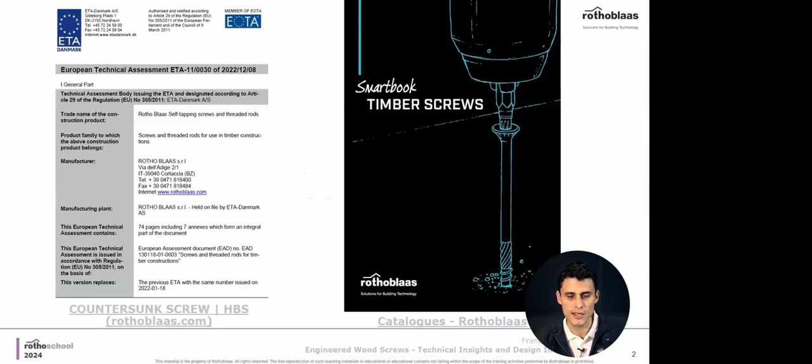So hope that after this presentation you can go and download these documents to study them and make a deeper impact on your projects.

Starting with the ETA, as I told you, it's the European Technical Assessment, basically the technical description of our screws. This document was developed to go further and give a better understanding and description of our screws, because most screws in the market are developed with another documentation called EN 14592, which is basically the most basic documentation for timber screws. So we went further and developed the ETA.

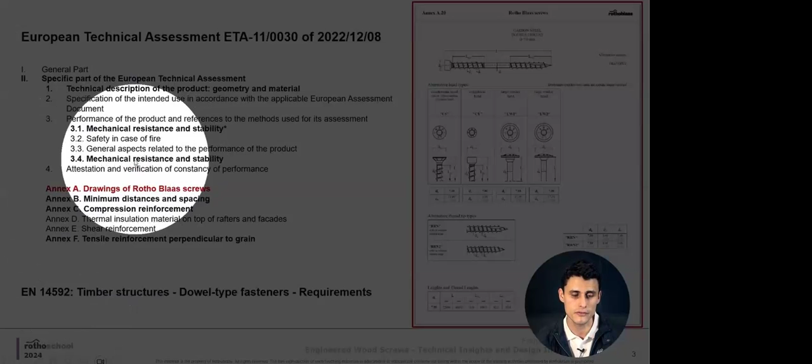In the ETA you can find these parts: a general part that's basically a description of the screws, and a specific part where we talk about specific issues. For example, we have a technical description of the products, like geometry and materials, a specification of intended use - it's important to say what these screws should be used for - and a description of the performance of the product, meaning mechanical resistance. We also talk about safety in case of fire, general aspects related to performance, and mechanical resistance and stability.

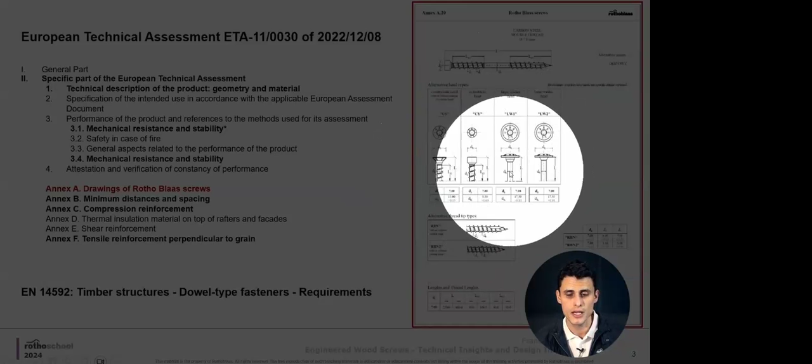Also, we have a lot of annexes that are really important. For example, Annex A shows basically the geometry of the screws. Here you find all the geometry aspects of the screws: the diameter of the head, the diameter of the body, the thread, etc. For every screw, you have one page with the full geometrical description, and there you can find this information, plus things like the minimum distances and compression reinforcement.

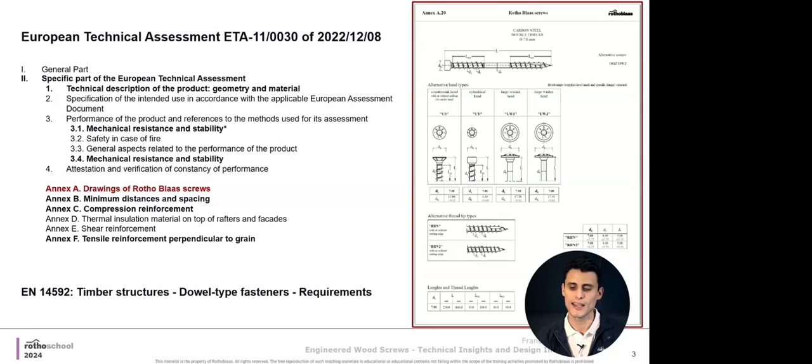It's important to note that in this presentation, I'm going to show you parts of the ETA. We are not going to read it all because, of course, it will be really tiring. The idea is that you have fun today and understand the document better, and later you can go read it by yourself.

The first part of the documentation is basically a description of the product, describing the geometry and material of the products. It's important to explain that wood screws are not just screws - they are different kinds of screws for different uses. In the description, we mention the 5 basic families that we have for our screws.

We have the screws I put in yellow, basically the HBS, the TBS, which are screws with partial thread. These are screws more used for carpentry connections. They have partial thread, so they can put the components together.

Then we also have the green screws in this case. These are structural, well, more suitable for structural connection screws. They are more rigid because they have a full thread. Also, they have different kinds of heads.

And then we have the DGZ, which is basically this purple screw. This screw is used to attach the insulation of facades in a structure.

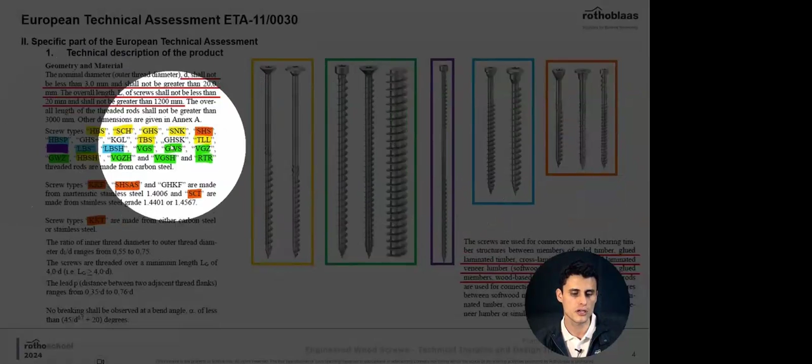In this case, as you can see, all these screws are described here with the codes that we have, which you can also find in our catalogs and on our website.

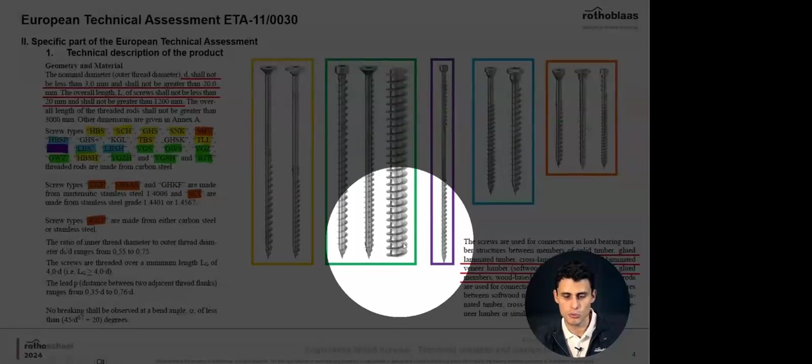This part also talks about the diameter these screws should have, that it should not be less than 3 millimeters and not greater than 20 millimeters. It also talks about the overall length, which shouldn't be less than 20 millimeters and more than 1,200 millimeters.

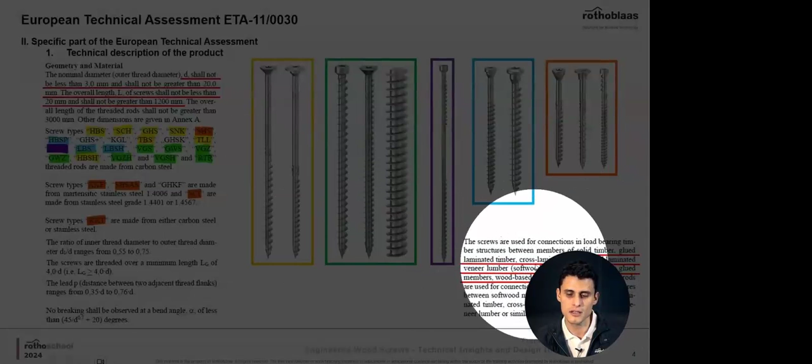In the bottom right corner, I highlight the main materials these screws are designed for: solid timber, glue laminated timber, cross laminated timber, LVL, and similar glued members. These screws are suitable for timber-based components or timber-based materials. This is a first description of the product, what it is suitable for, and what we are talking about in this document.

Afterwards, we start to talk about more specific issues of the screws that are really important to take into consideration for the design or also for the use of this kind of product.

In this case, for example, we talk about the insertion moment. You probably already know that if you put a screw inside the wood and use a really strong tool to install it, the screw can break. This always can happen because the metal, due to its properties, has a range where it can work.

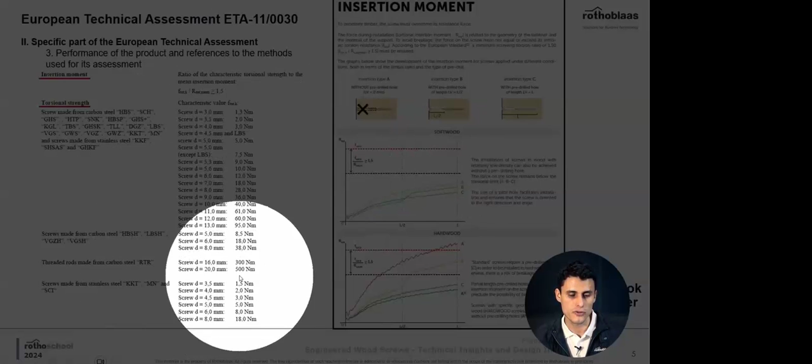In this ETA document, we mention this range where the metal our screws are made of can work. So we talk about the insertion moment, which is basically the moment you apply into the screw, and the torsional strength. The torsional strength depends on the material and the diameter. You can see a column with the diameters and a column with the torsional strength. If you put this number inside this formula, you find the insertion moment - the top insertion moment you should use, or less, so you don't break the screw. That's how you find it.

On the right of the screen, you can see something I took from the Smartbook for timber screws, because these two documents are interrelated, since we mention some issues from the ETA in the Smartbook and from the Smartbook in the ETA.

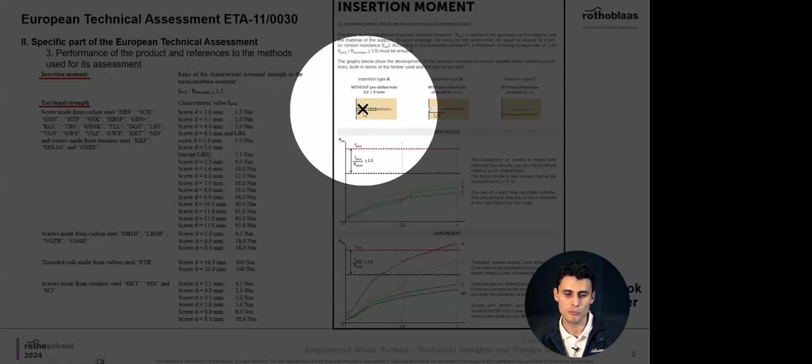In this case, for example, in the Smartbook, we talk about the insertion moment, that is basically this force that we apply to the screw. This force is also going to depend on the pre-drill that we do. For example, if we don't do pre-drill, if we do a pre-drill of just half of the screw, or if we do a pre-drill for the total length of the screw. In this case, you can see that, for example, when you have a pre-drill, the insertion moment is always lower than the extreme insertion moment that you should not achieve.

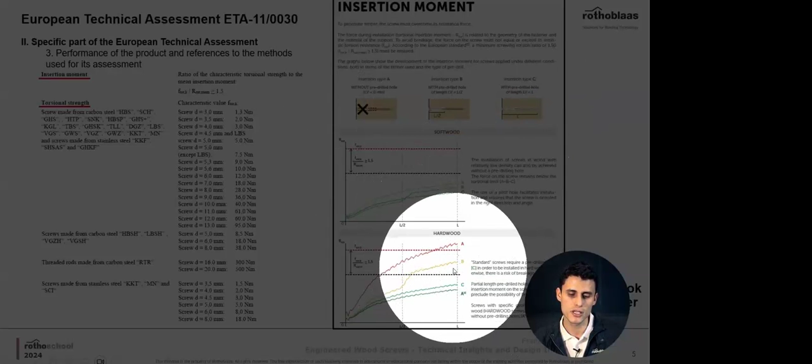This is for softwood, but when you have hardwood, and depending on the different conditions of the pre-drilling, you are going to have different situations of the torque applied to the screw. And therefore, for example, in case A, where you don't have any pre-drill, the screw is going to break. So this is really important to take into consideration, more as a practical advice that we give you, that you should not apply more than this torque to a screw so you don't break it.

Then we also talk a little bit more about this pre-drill. This is also from the Smartbook, on the right. We talk about the necessity of pre-drill when the density of the wood is higher than 550 kilograms per cubic meter. And here you can see a table that says what hole diameter you should use, depending on the outer thread diameter of the screw. This is really important. Our screws mostly work with the outside thread diameter. This is a big difference from other screws that are in the market.

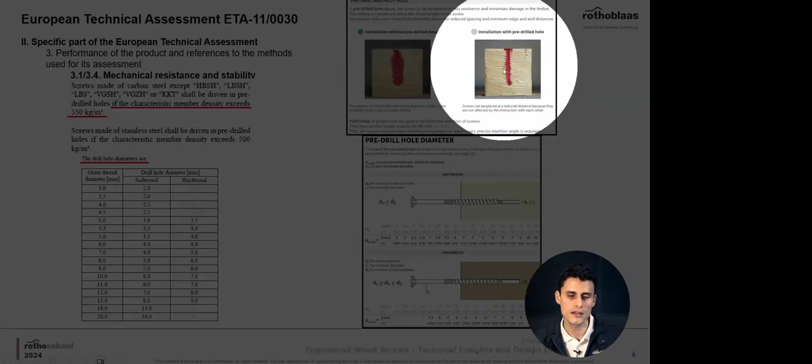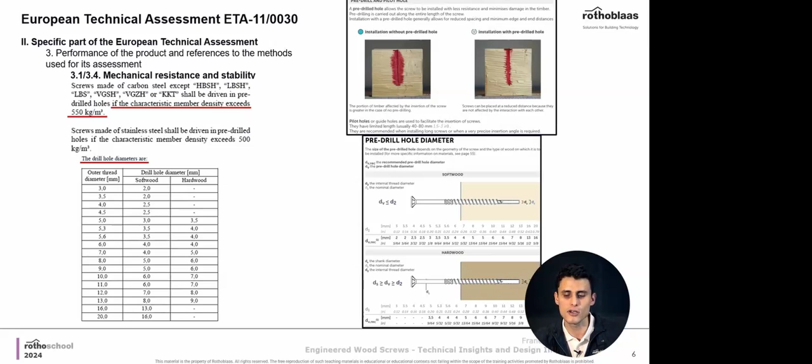And we also talk about the pre-drill hole diameter in the Smartbook, but this is something that you can take a look at. But this is a really, really important issue, especially with hardwoods, since I understand that in New Zealand and Australia you work a lot with hardwoods. Most of the time it's recommended to pre-drill hardwoods, even though we have some screws that are designed especially for hardwoods. It's better to always test and always make the calculations to define whether the pre-drill is necessary or not.

Okay, after these issues of use, installation, and so on, we started to talk about the mechanical resistance of the screws. How do we calculate how much load, for example shear load or axial load, a screw can take? Well, in the ETA document, we define the procedure to calculate these capacities. As I show you here, the ETA says that the calculation should be done based on Eurocode 5. Eurocode 5 is the code for designing timber structures in the European Union, and I show you here in the green box on the right the formulas that are included in the Eurocode. These formulas have been developed from the Johansen theory.

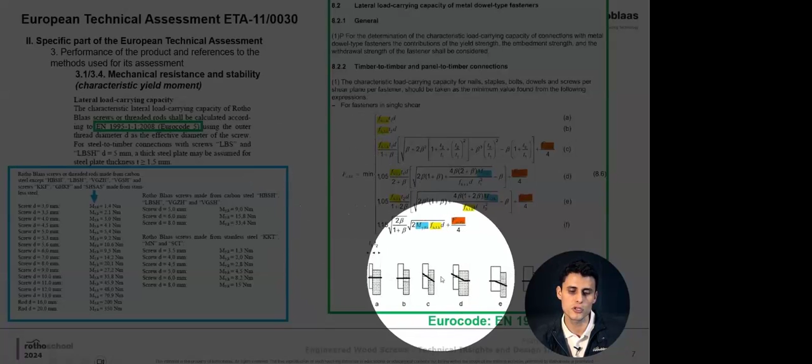Basically, Johansen developed these formulas for a shear failure of a connector, depending on whether the failure is going to happen through compression of the wood, through plasticity of the connector, or both. So you see here all these formulas that at the beginning can seem really complicated, but actually they are not that complicated. And why? Because I am going to show you where you can find all of the variables of these formulas.

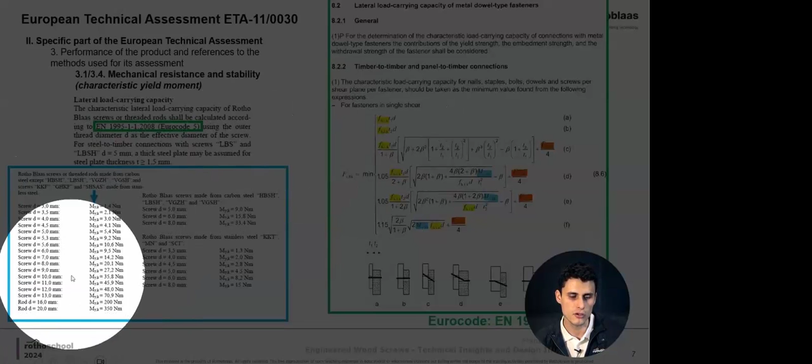To start with, in the ETA document, we talk about the characteristic yield moment. The characteristic yield moment is basically the moment where the material of the screw changes from the elastic side to the plastic side. When you apply this moment to the screw, it is going to pass to the plastic side. So in the ETA, we list the characteristic yield moments for every diameter of our screws. So as I show you here in a blue box, you can take this number from our ETA and include it here in the blue marks in the formulas.

To include the other aspects, we are going to have the embedding strength. The embedding strength is basically the capacity of the wood to be compressed. Of course, it is going to depend on the density of the wood that you are using.

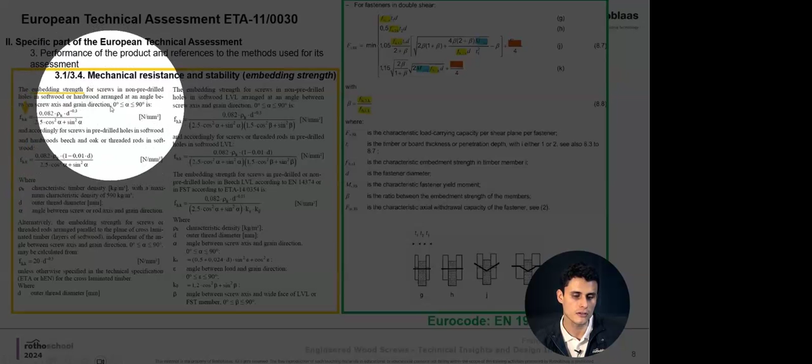So as you can see here, we are going to have in our ETA the formulas to calculate the embedding strength. It is going to be based on the characteristic density of the wood that you are using, the diameter of the connector, and the angle of the connector to the fibers of the wood. We have different formulas because, as you can read in the paragraph before, it depends on, for example, the angle to the grain, and whether or not you have pre-drilled holes.

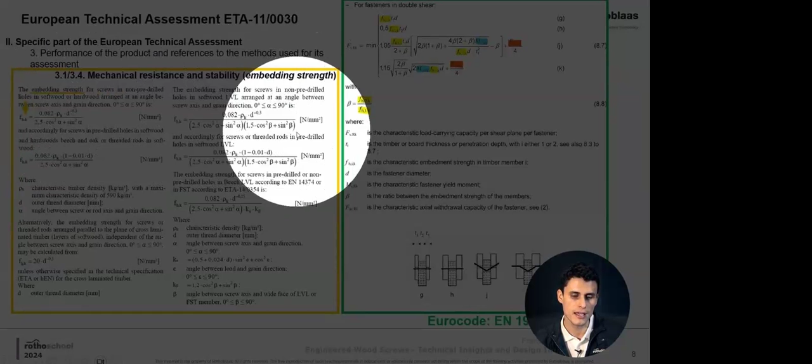On this other side, we have the formula for LVL, which I understand you use a lot in your country, in non-pre-drilled holes in LVL and in pre-drilled holes in LVL. Over here, we have, for example, the formula for the embedding strength in beech LVL, which is a really, really hard material.

So based on these formulas and on these variables, you can find your embedding strength, the fh,k, and put it in the Johansen formulas that are taken from the Eurocode. Johansen developed different formulas depending on whether there is just one shear plane or two shear planes, and also depending on whether all the components are wood or you have one component of wood and one component of steel, for example.

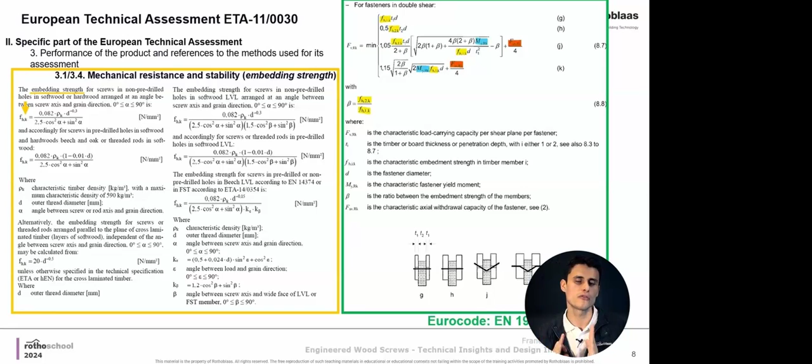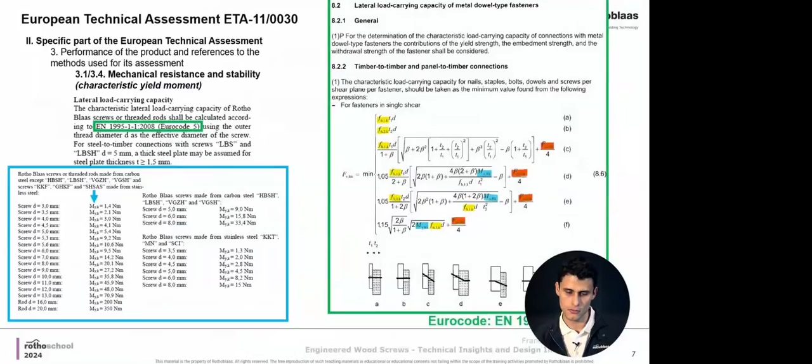In this case, before I presented to you the single shear plane, and here you can see the images, the graphic explanation of two shear planes for wood to wood connections.

The other aspect that we have in the Johansen formulas is the axial withdrawal capacity. This is also a really important aspect to define the capacity of the screw under tensile loads, right? When you have the screw and you try to take it out, this is the axial withdrawal capacity. Our ETA says how the axial withdrawal capacity should be calculated.

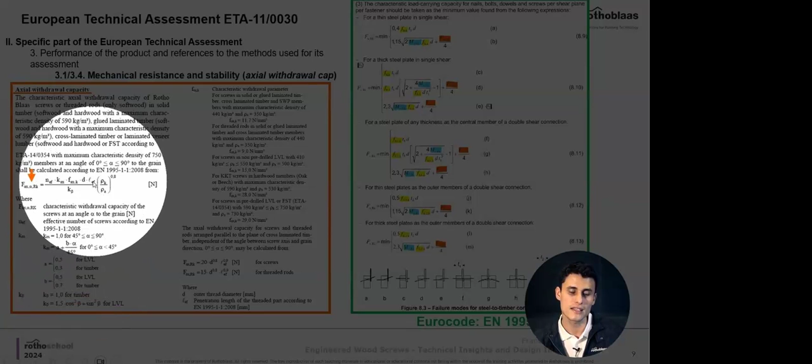It is based on the characteristic capacity of the material, the effective number of screws, meaning how many screws you have in that connection, and some other variables that you can find over here, including the effective length, which is basically how much of the screw is inserted inside the wood component.

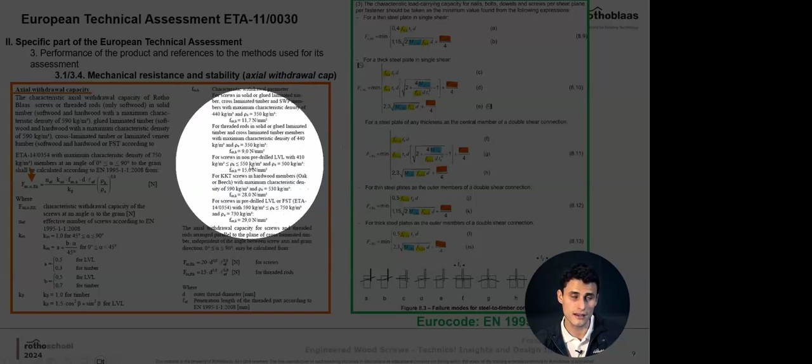For the characteristic withdrawal parameter of the material, here I put an example, but in the ETA you are going to find a lot of characteristic withdrawal parameters depending on the material and on the screw you are using. For example, here we have LVL with 410 kilograms per cubic meter, or other characteristic densities. You are going to find different parameters that you have to include in this formula, so you obtain the withdrawal capacity, and then you include it here.

This is really important because this part of the formula that says Fax divided by 4 is talking about the rope effect. Basically, the rope effect is, let's say, the way the axial capacity of the connector is going to help with the shear capacity, because when the connector starts to bend this way, the axial capacity starts to play a role. So this is important to include.

It is also important that the Eurocode establishes a limit on how much the axial capacity should be taken into account depending on the kind of connector that you have, whether it's a nail, a screw, a bolt, or anything. But yeah, it's important that you take this into account.

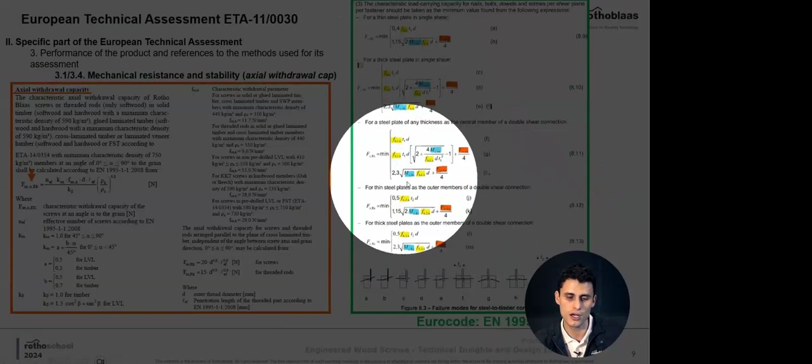And here at the bottom, you can see the graphic for these formulas, which are for the connection between a wood element and a steel plate element that varies in thickness. Depending on the thickness, you are going to have to use different formulas. All of this you can find in the Eurocode, and the information placed over here you can find in our ETA document.

Other important aspects present in the European Technical Assessment that we have for our screws are the mechanical resistance and stability related to the head pull-through capacity. Basically, this talks about the capacity when you pull the screw out by the head.

I mean, when you, for example, have a piece of wood, you have the screw inserted, and you have another piece of wood on the top of the screw, and you are pulling from that other piece of wood, not from the screw properly, the capacity depends on the head of the screw. This is really important because if you need a really high axial resistance, probably you will need to use a screw with a really thick head to have a better resistance.

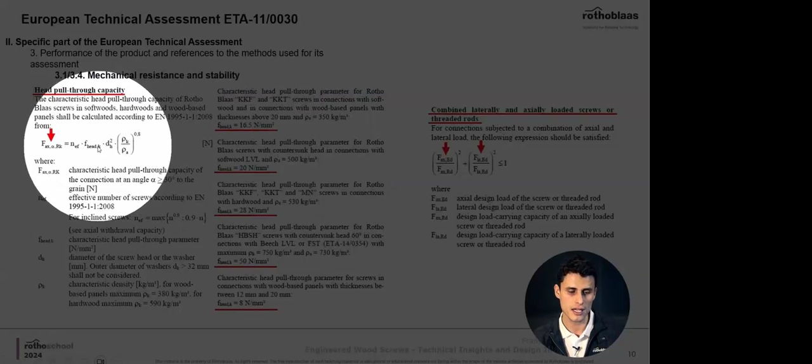In this case, we say that the axial head pull-through capacity can be calculated with this formula. It basically depends on the f head, the characteristic head pull-through parameter that we establish, and that you can find in the ETA document, depending on the material, depending on the particular screw that you are using, and you can find the number here, and then you take also the characteristic density and the base density for the calculation to apply the formula. Okay.

In this case, it is really important that when you do this calculation, you also take into account that the diameter of the screw is really, really important, same as the other formulas.

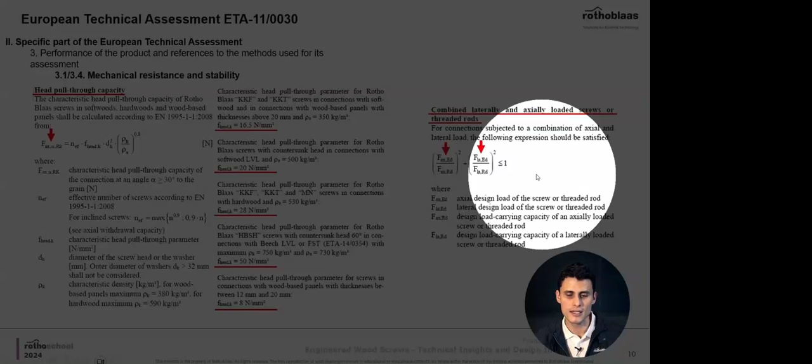And to finish with the mechanical resistance and stability, it's really important to make the calculation for the combined loads. This means when you have a screw loaded in both shear and axial, you should make the verification that this formula, which is basically the demanding load divided by the capacity of the screw in axial, plus the same but in shear, is going to be less than 1.

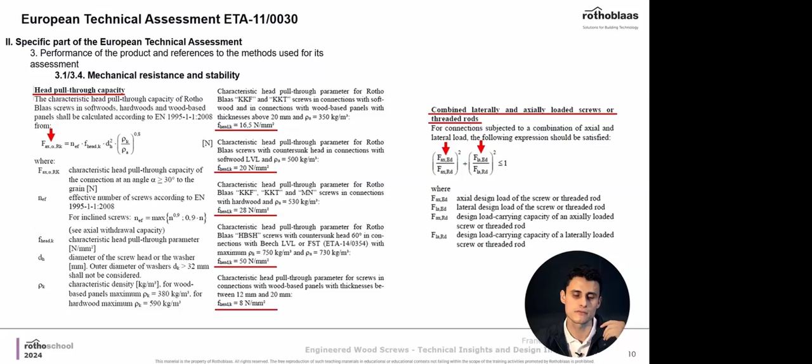So you are sure that if at some point the screw is submitted to both loads at the same time, it can take it. Because it can happen that the screw is good enough for axial, is good enough for shear, but when you combine them, the screw may fail. So that's what we are avoiding with this calculation. All of this, as I said, is described in the ETA document, and it is important that you consider all of this.

Talking about minimum distances. The ETA also talks about minimum distances. It is important that you understand this concept. We talk also in the Eurocode about minimum distances because if you put a screw really close to the border, really close to the side, the wood may fail. Therefore, if the wood fails, there is not going to be capacity. Even though the screw is really, really strong, there is no wood, so the connection will fail.

So we have to use the minimum distances to be sure that we have enough wood, enough material on all the sides of the screw to take the loads. Okay. So in the Eurocode you can find some minimum distances, but in the ETA we include them too, because the minimum distances from the ETA most of the time are lower than the ones established in the Eurocode. So we are improving the capacity and we are improving the technical details for our screws.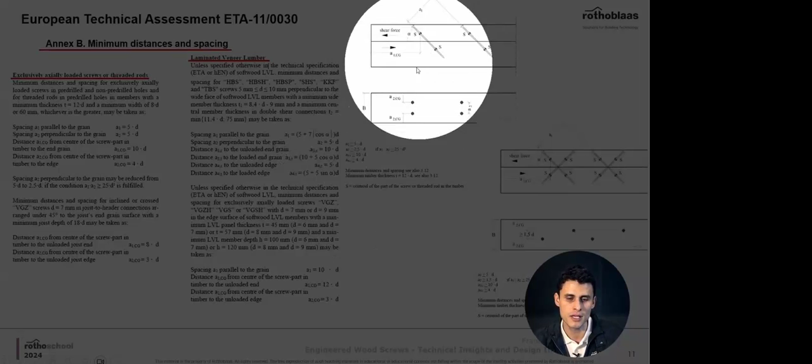Here you can see when you place screws at 45 degrees, you have the a1, that is basically the distance between them. We also have the a2,CG, that is the distance to the side border. And we also have the distance between them and the distance when you have cross screws. I put this here just to show you an example of the minimum distances we are talking about. In the document you can find all the details, but it's really important that the minimum distances are always described in terms of the diameter. That means that depending on the diameter of your screw, that's the distance that you should have.

Why? Because of course it's not the same having a screw of 5 millimeters with X distance to the border as having a screw of 12 millimeters, for example, with the same distance to the border. The screw with 12 millimeters is going to press the wood more, is going to affect the wood more, and therefore the wood is more likely to break or fail. And therefore we need more wood, so the minimum distance is increased.

Something really, really important about this issue too is that when you make the pre-drill, the minimum distances decrease. Why? Because as I showed you before, when you make the pre-drill, the breaking and damage of the wood is less, and you're going to have a better result for the connection.

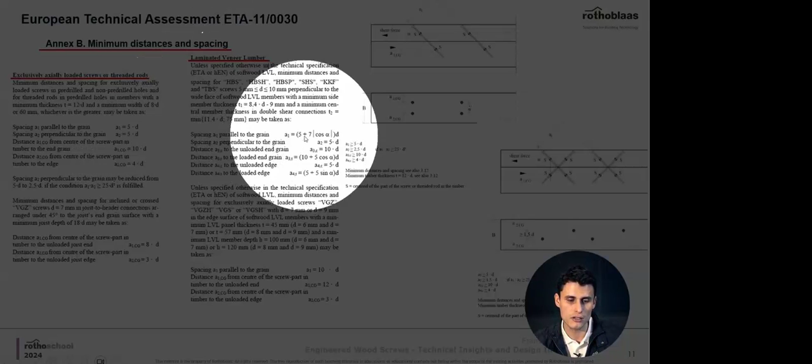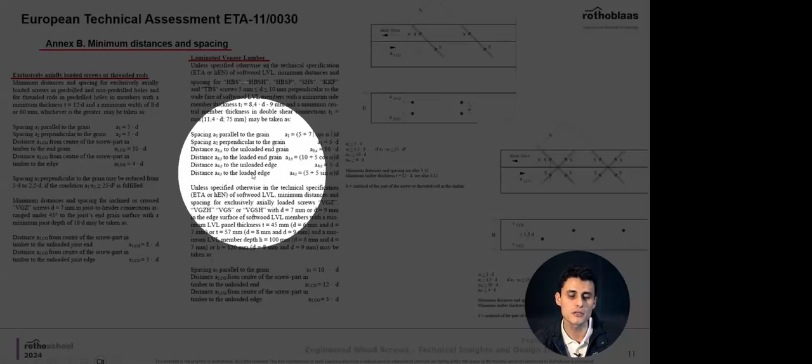I include here also the specification for the LVL, which I understand you use a lot in your market. We have specified clearly the procedure to calculate the minimum distances for the LVL. We have the spacing parallel to the grain, perpendicular to the grain, unloaded end grain, loaded end grain, and unloaded edge and loaded edge. The loaded and unloaded depends on where the load is coming from, and whether the edge or the end grain is or is not loaded.

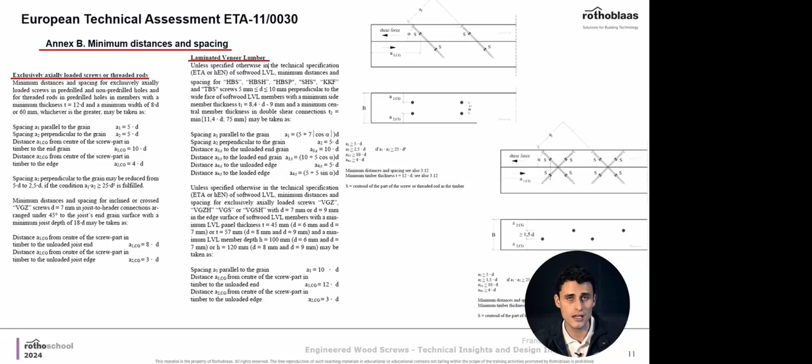If you need to get deeper into this, we are here to help, and you can contact our team in New Zealand so you have a better explanation. But it's really clear in our ETA and also in our technical data sheets that you can find online.

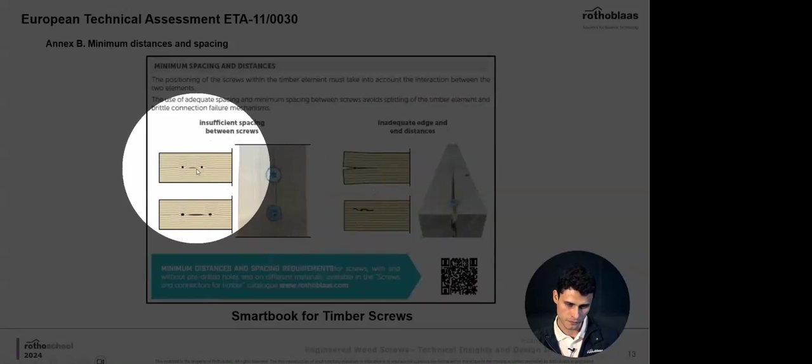This was what I was talking about the minimum distances, the importance of leaving enough distance between the screws. For example, in this case, we have the screws really close to each other, so the wood can open and is not going to work in the middle of the screws, and also to the border.

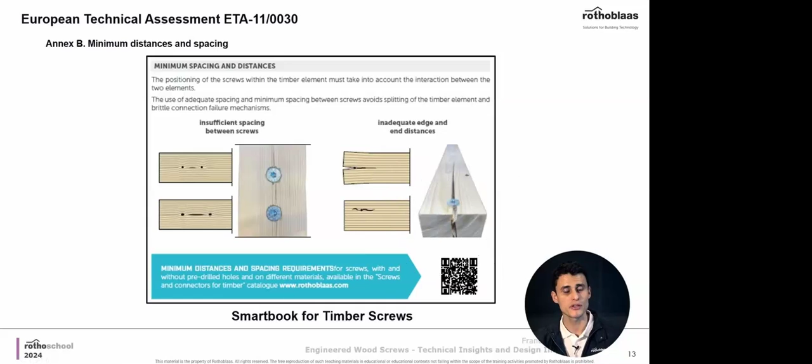This kind of failure is really common in wood construction because mostly the people that don't know about this put the nails or the screw really in the border of the piece, and if it doesn't break at the moment, it probably is going to break afterwards when the load is applied. So we have to be really careful with this.

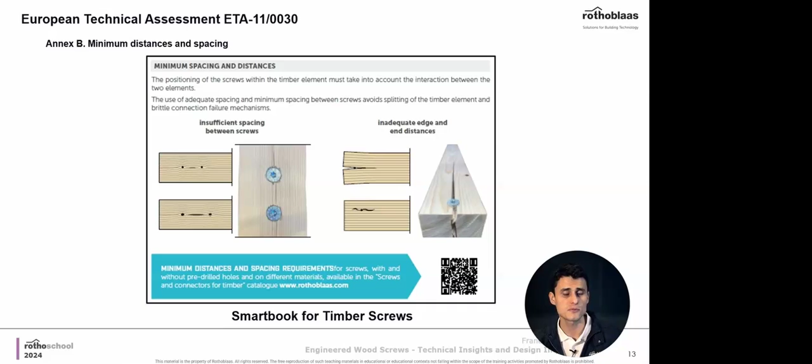As I told you, I'm not going screw by screw or product by product because it would take forever, but these are numbers that are really clearly specified in our technical documentation.

Another important issue included in the ETA, to close about this document, is that we specify the procedure to calculate the compression reinforcement. This is basically a reinforcement we do to the wood to improve its capacity of compression perpendicular to the grain. Depending on the species and type of wood, it has a limited capacity of compression perpendicular to the grain.

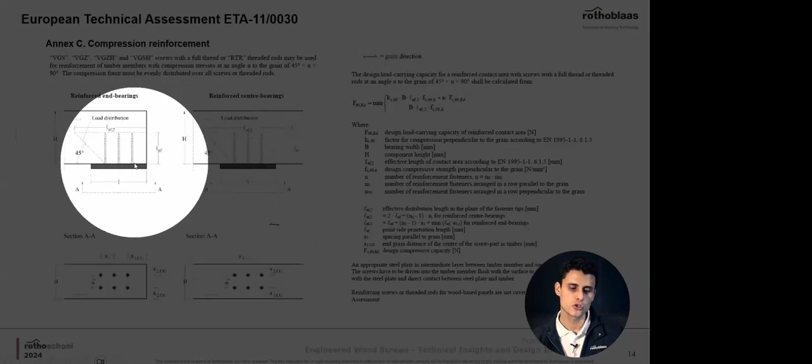For example, in this case, if you apply this compression here and the beam is by himself, probably it's going to fail sooner or later. So we put these full thread screws perpendicular to the grain to help take this compression and avoid the failure. This procedure is clearly specified in our ETA in Annex C.

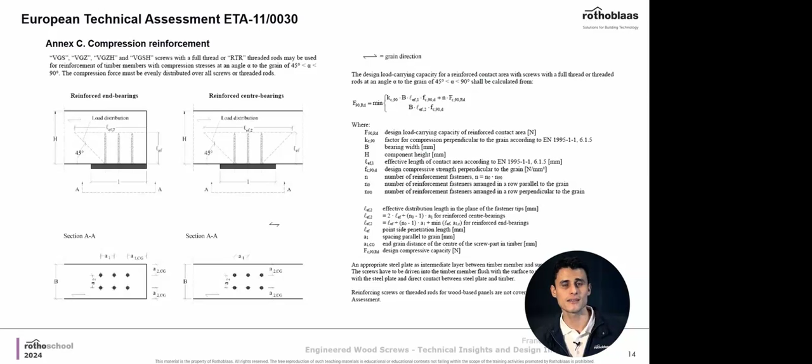So you can take a look at it in case you need it. It's really important that, as our screws are designed for this kind of use, we also specify it in the technical documentation. Same for the tensile reinforcement perpendicular to the grain.

You probably know that when you have this kind of cut in the beam, or when you have a connection that doesn't include the whole height of the beam, there is a chance that when you apply the load at the top of the beam, there can be a failure parallel to the grain. The wood is like little straws, one on top of each other, and when you apply a load, this kind of failure can happen.

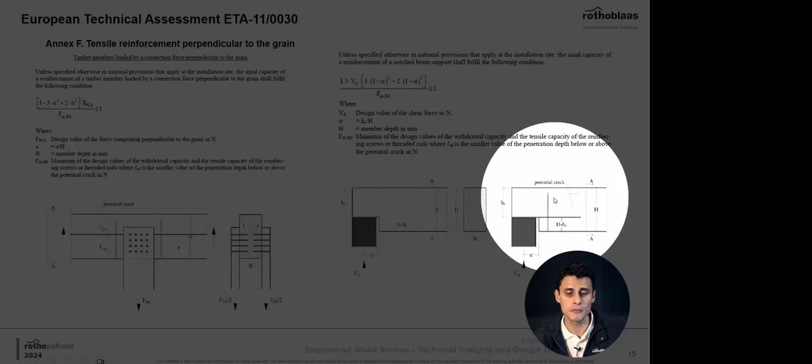That's why we have specified our full thread screws to make a reinforcement perpendicular to the grain that crosses from one side to the other of the beam and attaches all of these layers so they are not going to open after they are loaded. This is also clearly specified in the ETA, the formulas and everything to calculate this kind of use.

Okay, so that's all for the ETA. As I told you, I don't want to go really deep into the numbers and product by product because it would take forever, but it was basically a description, and the document is really clear. You can download it, take a look at it, study it, and in case you need more information, you can write to me or to my colleagues over there, and we will be happy to answer your questions.

About the Smartbook, this is a document that we developed some years ago trying to explain several issues related to our connectors. Not just about the connector itself, but mostly about what is outside the connector that affects it, because even though our products are really good, they can be installed in an infinite variety of environments, issues, or wood species. So it was really important for us that everyone in the market can understand these aspects that are related to the behavior of the connector but are not part of the connector.

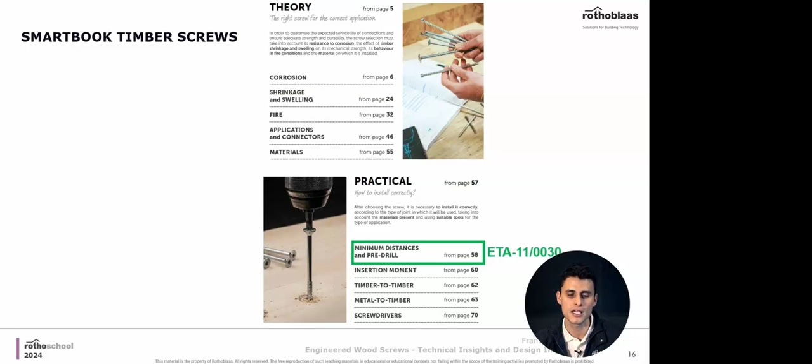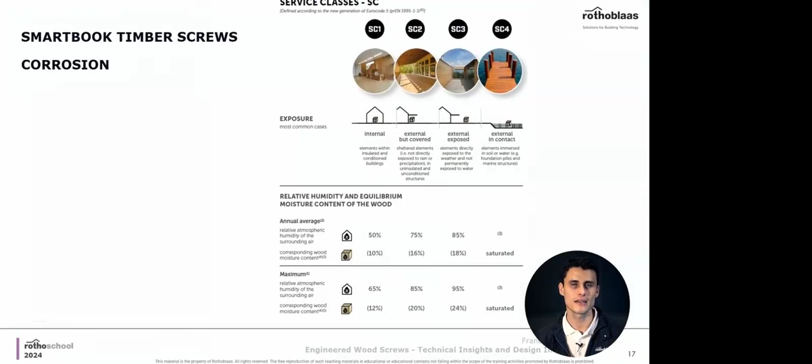Okay, so talking about corrosion, basically corrosion depends a lot on where the project is located, where the screw is going to be placed. The first issue about the emplacement of the screw is the service class. The European normative Eurocode 5 established 4 service classes.

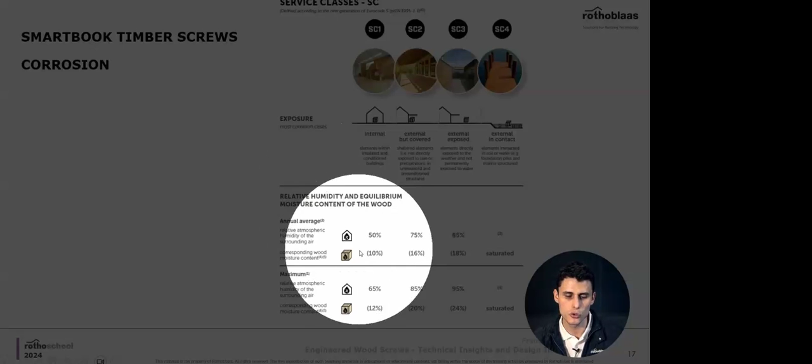The first one is when you have, let's say, an inside environment, the internal environment. You have a really controlled humidity. Your wood is around 10% humidity. Everything is controlled, everything is good, no problems with moisture, no problems with water.

Service class 2, now you are getting a little bit closer to the water, to the humidity. You are external but covered, which means you have a roof that can cover your structure, but you can get in touch with humidity one way or the other, with raining, or you make a deck for parties and people are going to throw liquids. So you are a little bit more aware of the appearance of water.

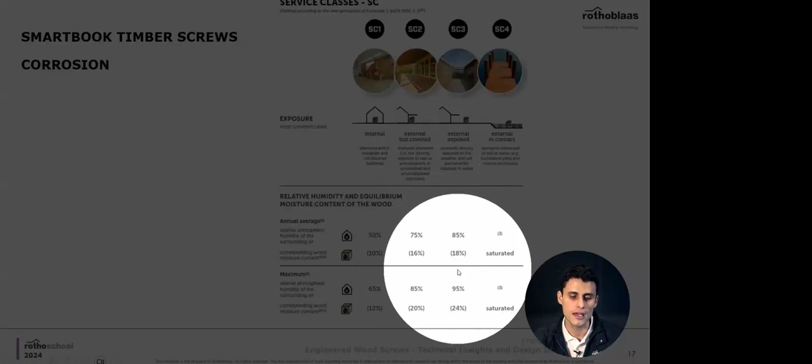Then you have service class 3. Service class 3 is exposed to water, completely external. There we have different kinds of service class 3, but the main thing is that the humidity of the atmosphere is going to be higher than 85%. The humidity of the wood can be 18%, and so on. So you have really external conditions for the connector. Therefore, you should install or design with a connector suitable for this condition.

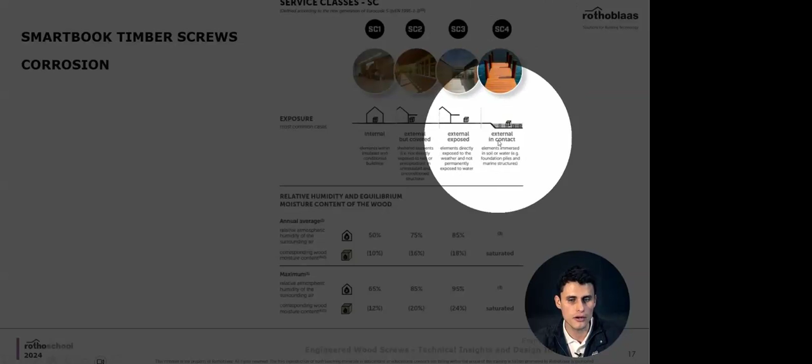And service class 4, which is included in the new Eurocode, the past version doesn't have it, is basically external but also in contact with water. It's basically saturated. We talk about ports, structures that are inside of the water, basically structures that are completely saturated. It's really important to understand where my project is located so we can choose the right connector.

Another really important issue about corrosivity is the atmospheric corrosivity class. It basically depends also on the placement of the structure, not related to the rain or the sun, but more related to the air. How much corrosive chemicals do we have in the air? For example, are we at the beach? Are we close to a factory that is producing salt or something like that?

So here you can see the 5 different corrosivity classes established by the Eurocode, by the EN 14592. That is the code we based the primary design of our screws on, and then we make the ETA. This norm talks about 5 corrosivity classes in the environment, and as you can see here, it depends on the moisture of the environment, the exposure to chlorides, and the exposure to pollutants.

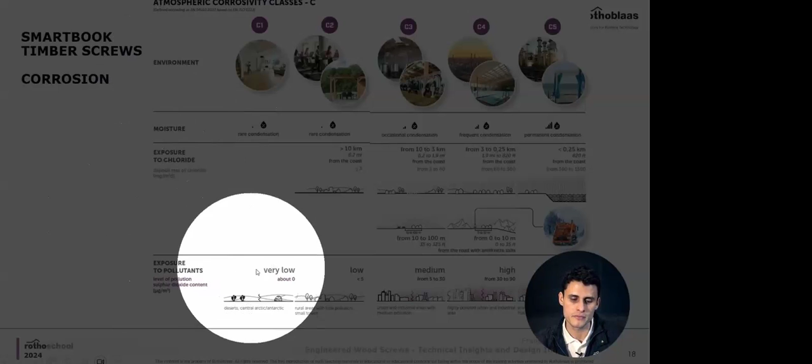You can see here the description. It basically depends, as I told you, if you are close to a place that has a lot of corrosivity. For example, farms for cows or industrial production, most of the time pollute a little bit with some high corrosivity chemicals that can affect our connectors. This is something also really important to take into consideration.

For example, I'm not sure if you have snow over there, but when you have snow, you also probably going to have the salt that they throw to take away the snow in the streets. So this salt is going to be a really highly corrosive material for our connectors.

Another really important issue: we already have the service class, we have the atmospheric corrosivity class, and now we have the wood corrosivity class.

Depending on the species of wood you are using, you can have a really corrosive wood, because the wood has something called the pH, which is basically the acetic acid ester that acts through inside the wood and may corrode the connector. We have 5 different wood corrosivity classes, as you can see over here.

But it doesn't just depend on the pH of the wood, it also depends on the wood treatment. For example, back in my country, Costa Rica, we use a lot of pine treated to build outside. But this treatment of the wood could have a really high impact on the corrosion of the connector, depending on the material they use to make this treatment. So it's really important that you talk to the company you are buying the wood from, to see if the wood by itself is corrosive or if it's the treatment.

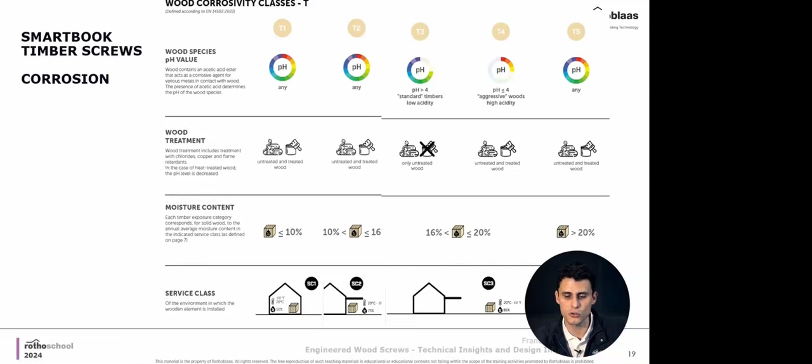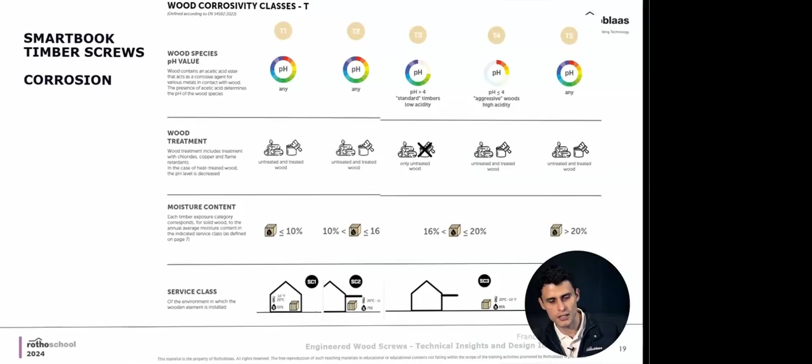Also, it's really important to consider the moisture content, because depending on the content of the wood, it can be more or less corrosive for the connector, and the service class is also related to the wood species. So taking into account these three variables...

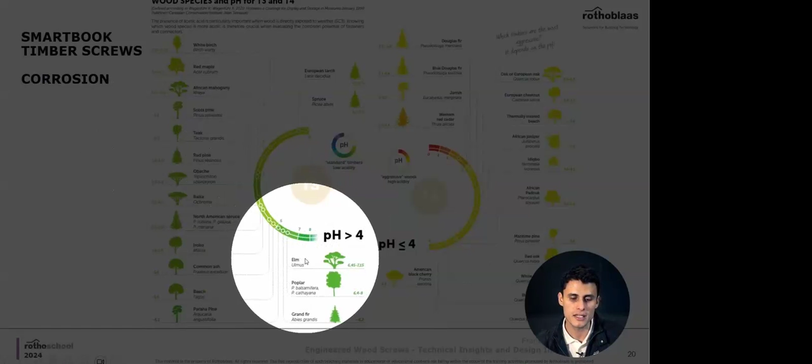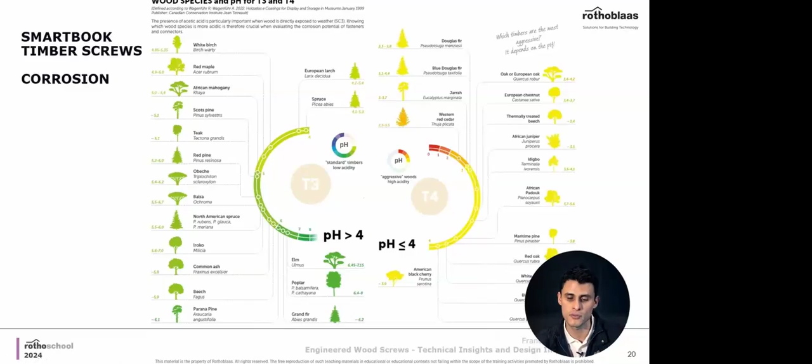Before that, we also included in the Smartbook this graphic that shows the pH of some of the most used wood species. We can see, for example, teak with a pH of 5.1, and ulmus with this pH. These are the less corrosive wood species, the T3. On this side we have T4, which is more corrosive for the connectors. We have beech, and some African wood. So it's important that when you are going to build with local woods, you try to find the pH of that wood, so you can choose the right connector starting from there.

How? For example, with this graphic we have over here. In this graphic, we include the atmospheric corrosivity class, the C I told you before, and the T, the wood corrosivity class, timber corrosivity class, in beige color. We have the atmospheric corrosivity class in purple. And on the outside of the circle, you can see the different materials we have for our screws.

This is something really important. We have different materials to build our screws: steel, carbon steel, zinc treated. That's the most basic one, like you can see over here that says zinc, which is zinc coated. It's suitable, for example, for atmospheric corrosivities 1 and 2, and timber corrosivities 1 and 2.

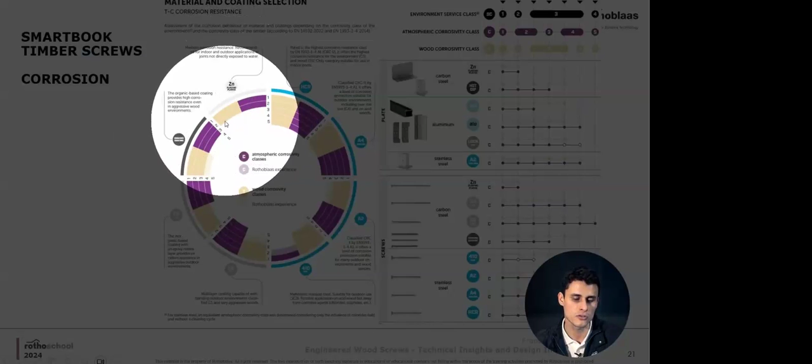Starting from there, we have the EVO, which is over here, you can see it. We also have the C4 and C5 EVO. That's basically a skin we put on our screws that has aluminum and particles of resin that we developed to protect the screws against corrosive environments. This is important because the screw is not stainless steel, so it's not so expensive, but it's really good against corrosion. So this is a really good product, for example, for the beach or other really corrosive environments for screws.

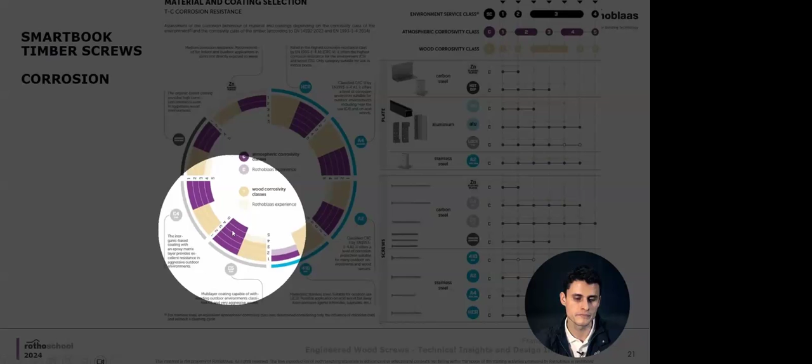Also, we have the organic coating, which is an important coating for some conditions. You can see here that the C4 and C5 are established for atmospheric corrosivity class up to 5, which means they are really good. Also regarding wood corrosivity, we mark here the ones that are certified, but in this light gray color, we mark the ones that we think, from our experience, are suitable but not certified, though we can still say they are suitable.

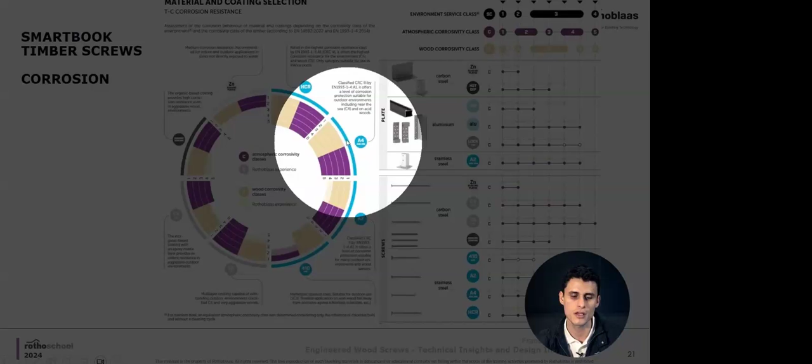And then on the other side, we have the stainless steel. We also have some screws in stainless steel. It's important to understand that stainless steel is a really good material for corrosiveness, but it's not a really good material mechanically speaking. If you need really high shear resistance or high mechanical resistance, probably the EVO is a good option, because it's made out of a material that is mechanically capable with good corrosive capacity. On the other side, stainless steel is also really good for corrosive environments, but the mechanical resistance is not that high.

Here we have another page of the Smartbook that talks about what Rothoblaas has. We have a lot of screws, but we also work a lot with plates. We combine our screws with some plates, especially designed for timber, and we make the connection from a timber structure with the plates.

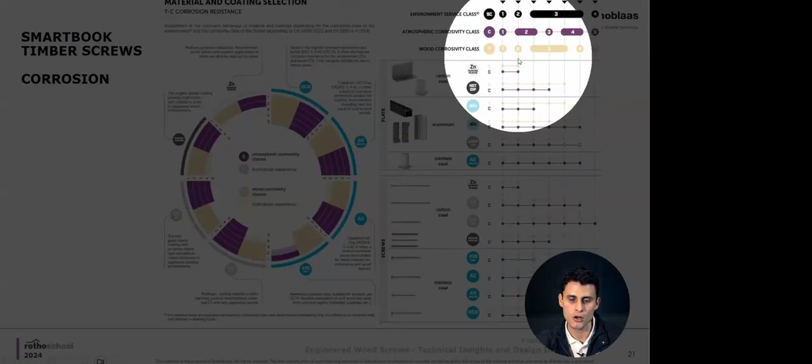These plates are made out of metal, so they can be really affected by corrosivity. In this graphic, we put the environmental service class, the atmospheric corrosivity class, and the wood corrosivity class, and we mark if any of these connectors, depending on the metal they are made of, are suitable for this condition. So if you know the service class, the atmospheric corrosivity class, and the wood corrosivity class, you can come here and find your screw and your plate, at least the material.

Of course, the size and all these details depend on the connection, the loads, and everything, but at least you will know the material. For example, here we have this kind of T-shaped plate made out of aluminum, and aluminum has no problems with corrosivity.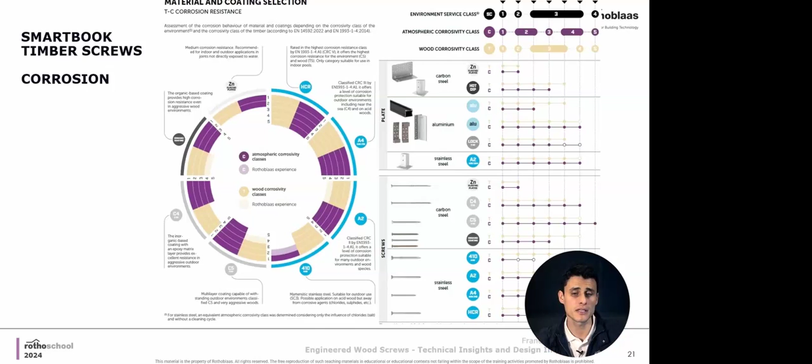This is also something that has to be taken care of carefully. In the Smartbook, we talk a little about how the material from a connector affects other metals. This is really important, a chemical process you should take into account. It's not just that I put aluminum or stainless steel and that's it, because when they interact, they can provoke some problems depending on the environment and the timber you're using. So this is something important to take into consideration.

Another important issue with timber is fire. Timber is a material that reacts to fire in a really interesting way. It burns from outside to the inside, with a ratio depending on the wood species that can go between 0.5 to 0.7 or 0.8 millimeters per second or per minute, depending on the rate you're using. So if fire comes to a timber structure, it's going to start burning from the outside, but the inside is going to be stable.

This means that placing the connectors inside the timber makes the timber protect the connector. Why? Because the connectors are made out of metal, and metal materials, when exposed to high temperatures and fire, melt. They pass really easily into the plastic range, and they fail really easily.

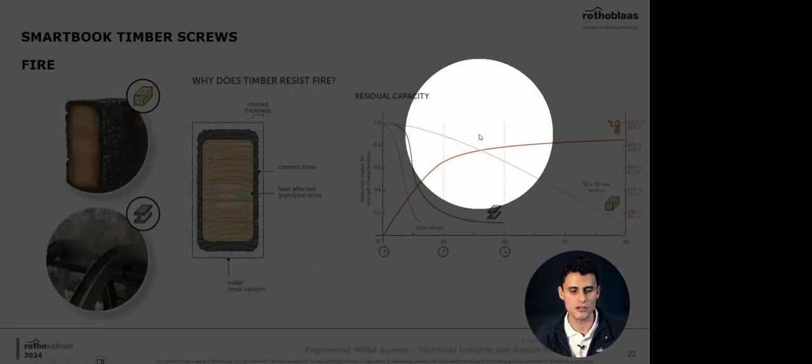In the Smartbook, we have graphics that show, for example, how the structural capacity of the metal decreases really fast with fire. But on the other side, the wood's structural capacity decreases, but decreases really slowly with time, making it suitable for firefighters to come in and for people to escape. The structure is not going to easily fail. That's why we say timber is a good material for fire.

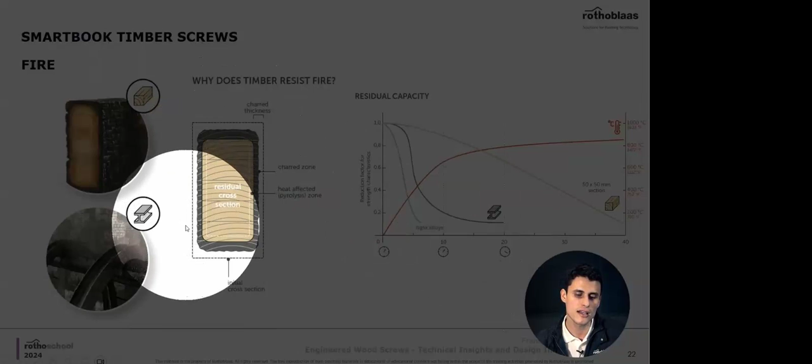Of course, it should be designed to take the fire. So we design, for example, a beam with a base section to take the loads, and then we put an extra layer of wood so this extra layer can take the fire and burn without compromising the structural capacity of the structure.

How does this affect the connectors? Well, if they are inside the wood element, they are going to be protected, but at some point they can be affected. How much heat the connectors transfer from outside to the timber depends on a variety of issues, including the length, how long they are.

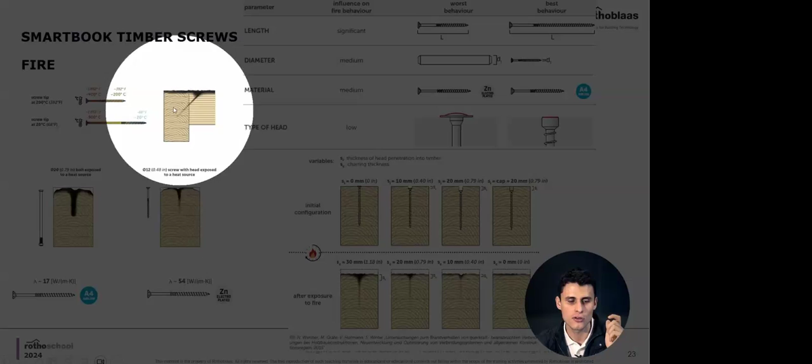In this chart you can see the worst behavior comes from little screws, because they get really warm, and also long screws get really warm on the head, but on the front they don't get that warm and won't affect the wood. Also, the diameter is really important. Here you can see how a bigger diameter causes more damage in the wood compared to a smaller diameter screw, and we also have different behavior based on the material, since thermal conductivity varies.

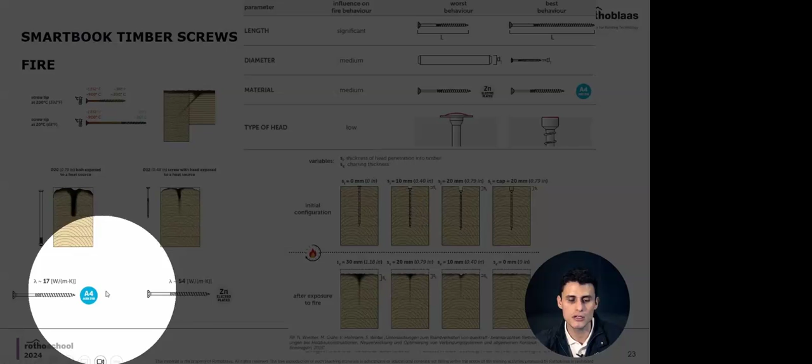For example, stainless steel screws have less thermal conductivity than zinc electroplated screws. So all of this has to be taken into consideration when you choose a screw, especially if you are designing while taking fire into account.

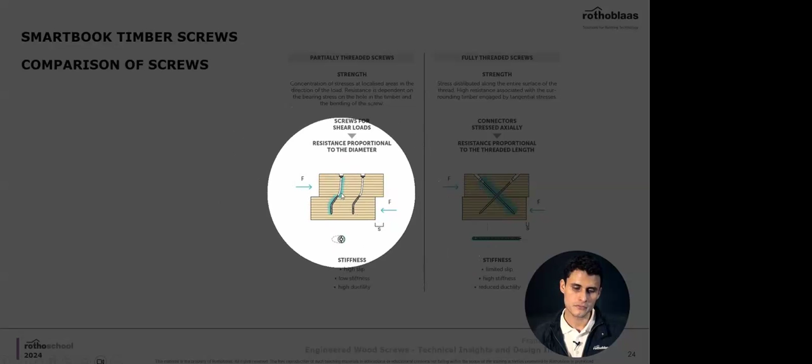To finish this part of the Smartbook on screws, it's really important to talk about the difference between full thread and partial thread screws. As you can see here, partial thread screws give less stiffness to the connection. Why? Because in this connection between two pieces, when you apply a shear load, in the wood element on top there is basically no link between the screw and the wood element. It's just acting by compressing the wood, it doesn't have a thread that connects to the wood. That's why when you apply the load, it easily fails, because there's nothing linking the two elements.

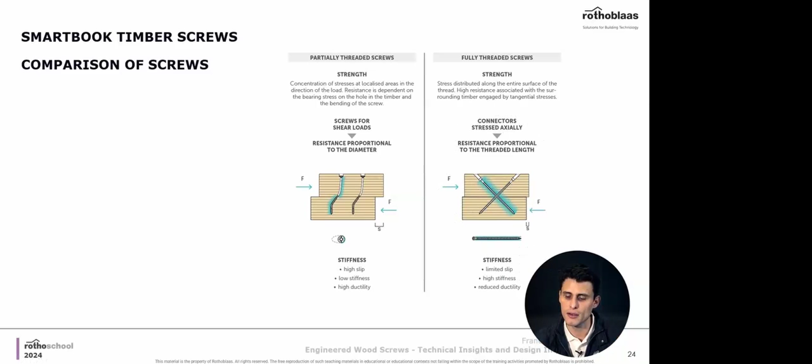On the other side, the full thread screws we see over here, which we always recommend placing at 45 degrees, have the thread linking the screw to the wood element. Therefore, when you apply the load, they have a really good behavior, and the stiffness is really high.

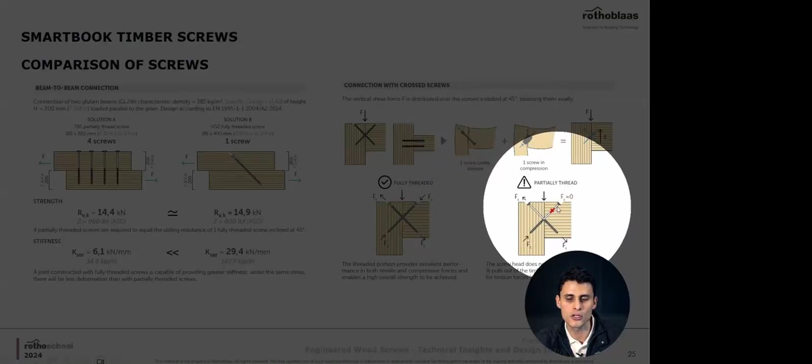One of the connections we really like and promote is this one. When you have a main beam or column and another beam, you put two screws at 45 degrees from each side, taking the shear load, but these screws have to be full thread. Why? Because one screw is working in compression and the other is working in tension. But if you have a screw that is not full thread, the compression cannot be taken, because there is no thread linking the screw with the wood. There is freedom of movement there, and therefore no capacity to take the loads.

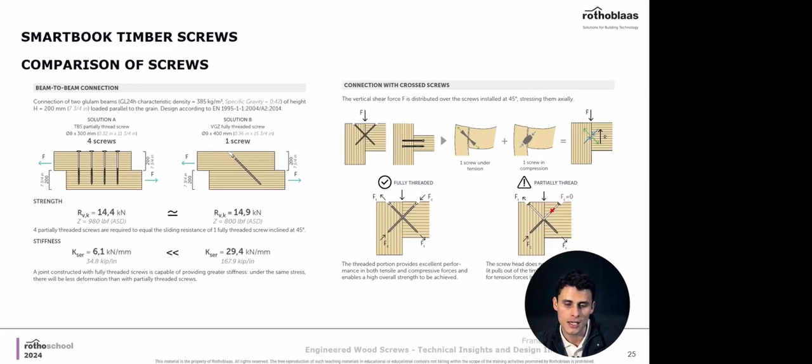This is something really important. You can take a look at the Smartbook to understand it a little better. We have a lot of detail about this issue in the documents, so you can take a look over there.

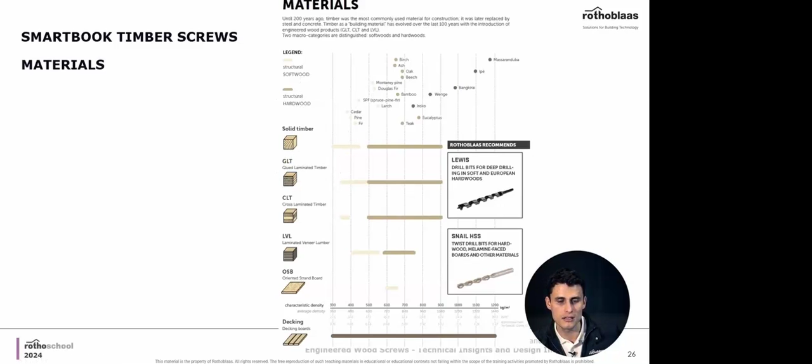Another really important issue we've done a lot of research on recently is one of the questions we get the most: can I use an impact drill machine or not? This is really important because when you apply impact to the screws, it causes degradation on the material of the screws, which over time decreases their capacity.

It's also really important, if possible, to measure the insertion moment, so we can be sure which moment we are applying to the screw. We have some tools for this in our tools catalog. It's really important to be aware of which tool your company or builder is using to install the screws, because it can really affect their behavior in the long term.

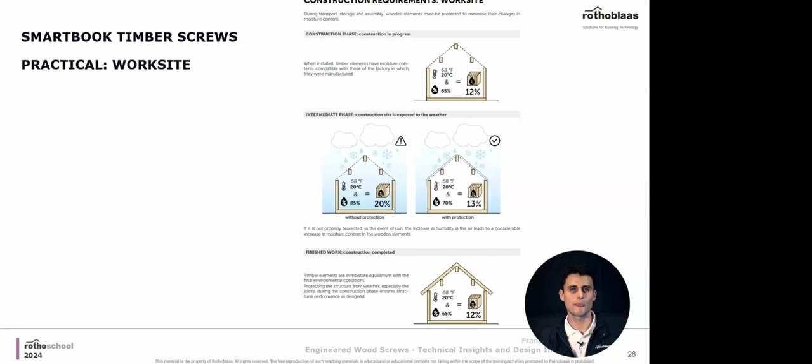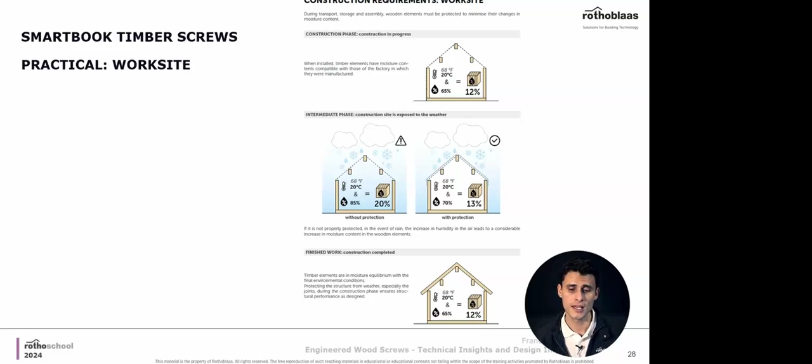It's also really important to be aware of the conditions at the work site. For example, you might design a project with a defined humidity content, but you don't know if when they build the project it's going to rain or snow. You'll have different humidity conditions, and the humidity of the wood can change, which can provoke corrosion or other problems with the behavior of the connectors.

I did this final part a little faster because I was running out of time, but I really invite you to go to the website, download the Smartbook, download the ETA, read it, study it. It's a really, really good tool we're giving to you, with a lot of important information. If you read it and something isn't clear, or you have another question or input, here is my email. You can write to me.